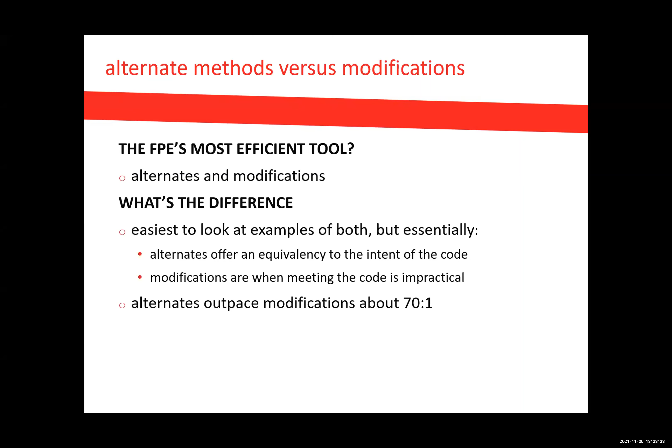We're going to go through and show you some examples, but you'll see where that comes into play, where existing structural provisions, not something that's easily modified in the field, impacts what is required by code. Whereas alternates are pretty much most everything else.

So let's start with the alternates. Alternates, known by any variety of names depending upon exactly what jurisdiction you might be working with. Our company standard, we like to call them requests for alternate methods. But the code verbiage in particular talks about alternate means and methods requests.

Other jurisdictions will call them code equivalencies or requests for variance. I'm sure everybody on here has dealt with them in one way, shape, or form over their careers. Those are driven by IBC section 104.11.

This is the provision in the code that allows the building official to accept alternate means and methods. Here's just an excerpt from the code. As you can see, in particular, it talks about the proposed design complying with the intent of the code, so meeting or exceeding what the code requires.

We'll look at some examples, and hopefully that'll become clear. The reason why these concepts with alternates and modifications are so important is because we don't live in a world of black and white. There are a lot of gray situations that don't specifically meet code. This is when the negotiations become important, the interpretation becomes important.

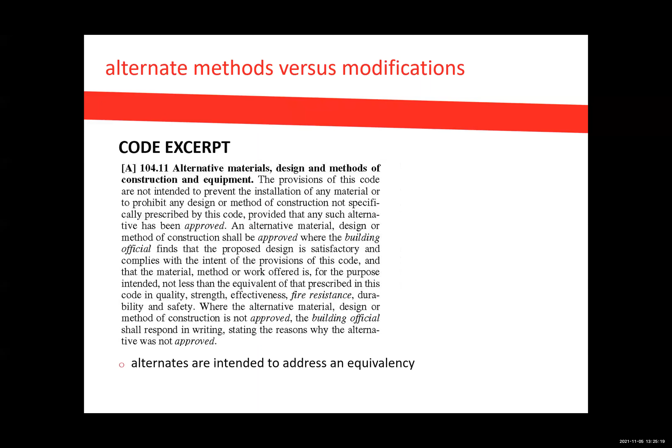This is why it's important for y'all as architects to have a baseline understanding of the building and fire code provisions. What I'm talking about here, both alternates and modifications, this is not something that you need a code consultant for, not that I'm trying to keep myself out of work. As long as you're a licensed design professional, you can go ahead and pursue these types of approvals. And I'm sure many of y'all have gone ahead and done that.

First example is actually probably the easiest, which deals with future code adoptions, aka a chip shot, right? These are the provisions that are going to be adopted, but aren't yet adopted because, of course, current code, the 2021 edition for instance, which is the latest edition of the IBC and IFC, the ICC codes, that has not yet been adopted by any jurisdiction here in the state, probably not anywhere nationwide at this point.

It takes a couple of years for jurisdictions to go ahead and adopt codes. So we like to look forward to see what exactly is involved, and what exactly is allowed under the future code provisions, and see if it's practical to go ahead and apply them to our current projects.

A couple of examples: egress width factors. Anybody who's been in the business for the last 10, 15 years may very well recall when, under the 2009 edition, the reduced egress width factors allowed for sprinklered buildings just went away.

That left a lot of projects and properties in a lurch. Think about it: you've got a property designed to a 0.15, 0.2 exit width factor, and all of a sudden the only thing you're allowed to use is 0.2, 0.3. How do you make modifications?

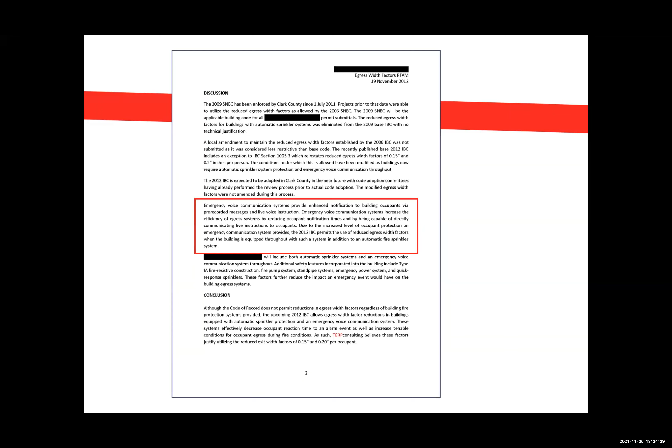So it kind of brings it to the table in terms of: here's what we're trying to do, here's why we should be able to do it, and once again, let me remind you, this is why we want to do it. Pretty straightforward. This is a pretty straightforward type of alternate.

No questions in particular about this, so let's move on and take a look. Okay, let's talk a little bit more about sprinklers.

Sprinklers are involved in a large number of the alternates that we work with, particularly because there are code provisions that are disconnected from the need for sprinklers. An example of this would be fire resistance ratings.

Fire resistance of assemblies is tested in accordance with ASTM E119. E119 is the furnace test, commonly referred to as the time temperature curve. That's what any assembly is subjected to, and it's a very big fire, and it is not sprinkler controlled.

So anytime you have an assembly, whether you're looking at doors, opening protectives, an assembly itself, or a through penetration system, they're all tested to the same time temperature curve. It's a difficult curve, intentionally a difficult curve to meet in terms of maintaining temperatures on the other side away from the fire.

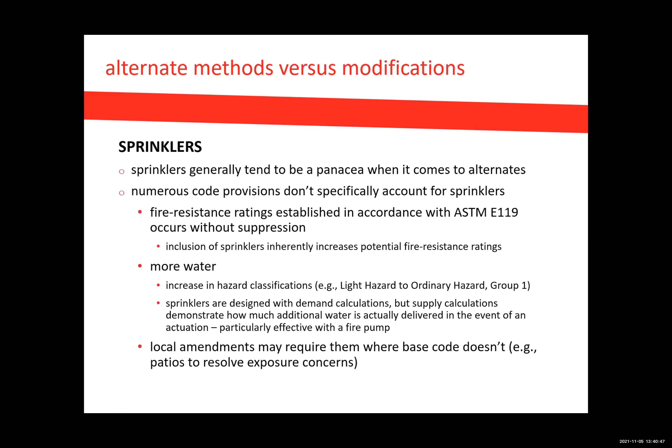So here we have a situation. Sometimes alternates are driven by design aspects. So for instance, a designer wants to go ahead and do something that's not exactly within the bounds of code, and that's understood from the beginning. Other times it happens because issues arise in the field.

For instance, we had a situation where the contractor did not install the proper ceiling system in a type 5A building, which of course is required, which is combustible 1 hour construction. In this particular instance, type X gypsum was inadvertently substituted for type C. If you're unfamiliar with the differences between type X and type C, type X is what you're going to find in most construction. Type C actually is infused with more glass fibers and so it has a greater structural stability. So you'll see type C gypsum board in horizontal installations, so ceiling lids, for instance, which was exactly what happened here.

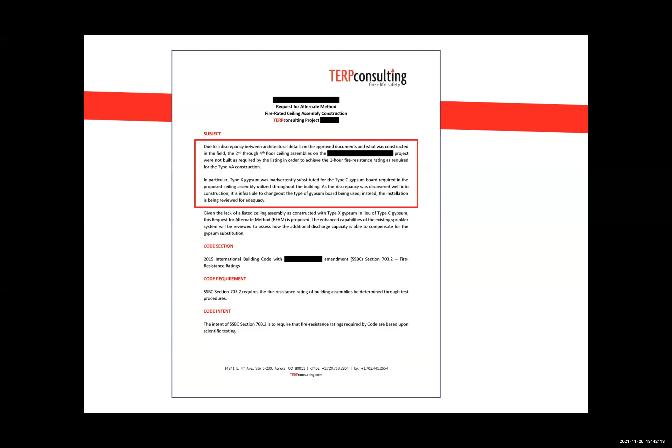Since it was discovered well into construction, we had to look at alternate means of providing the equivalent fire resistance rating. And so for this, we turned to sprinklers primarily. We took a look at the assembly and the discussion, once again, same kind of layout, request, discussion. So there was some discussion as to whether or not we could get 1 hour from the type X versus the type C. And the conclusion was that it was very likely not the case, because generally, if the manufacturer had been able to achieve the 1 hour rating with type X, chances are that's how they would have got it listed, because it's cheaper. And that means if it's cheaper, the assembly is going to be utilized more often. So the baseline was that while we were going to get some level of fire resistance rating, we weren't certain that we were going to get the 1 hour.

So what we did here was we took a look at the sprinkler system, and you'll see it says that we took a look at the base design, which would have required a light hazard system. This was a hotel, and would have required essentially a light hazard density, which is a 0.1 over the remote area.

This particular building had a fire pump, so we did what's called supply calculations versus demand calculations. You'll see the summary of that at the top of the RFAM. What that shows is we took a look at the remote areas in the building. Each has a different discharge area because you're looking at small compartments. Then we looked at the volume, and you could see those densities. Remember, our requirement was 0.1.

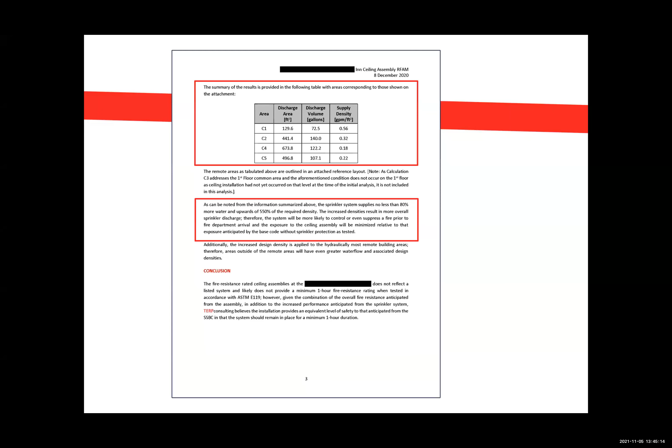As I said, this was supplemented by the fact that we had a fire pump, which certainly drives pressures higher than you would expect from a normal domestic system.

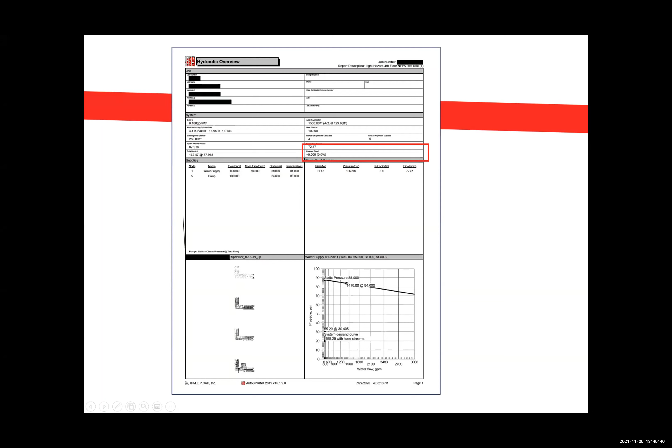This is just, I want to show this to you. I don't know how often y'all may look at sprinkler designs and hydraulic calculations, but what we've got right here, this is basically your safety factor—your pressure cushion. When you do a supply calculation, you're essentially driving the calculation to no pressure cushion whatsoever. So this is the maximum that would be theoretically available from the system given your design pressures. This can be a little difficult for a sprinkler contractor to get his arms around. Sometimes they need a little bit of prodding, but I can assure you they can do it relatively easily.

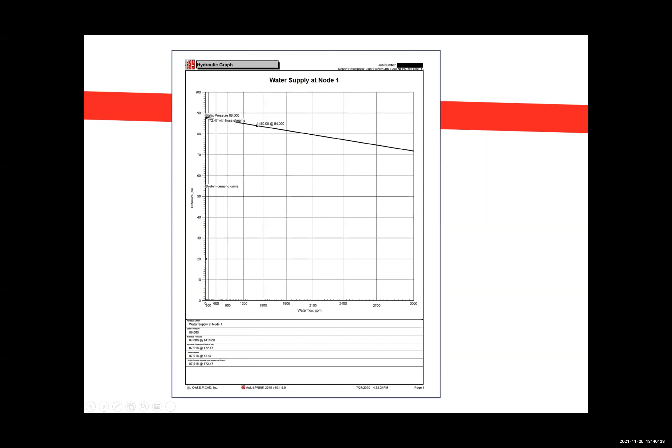If we were looking at a regular supply curve, you'd see the system demand sitting somewhere below the horizontal line, which represents the water supply. That's where you want to be under a normal design—it's where you're required to be, particularly when you have required safety factors from a jurisdiction. But in this instance, we wanted to represent how much water we could get out of the system.

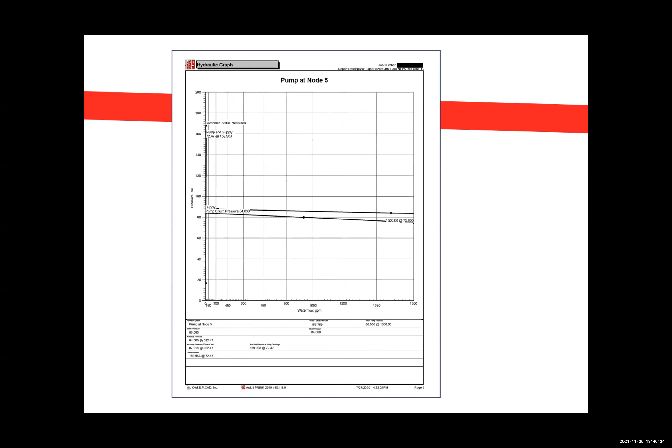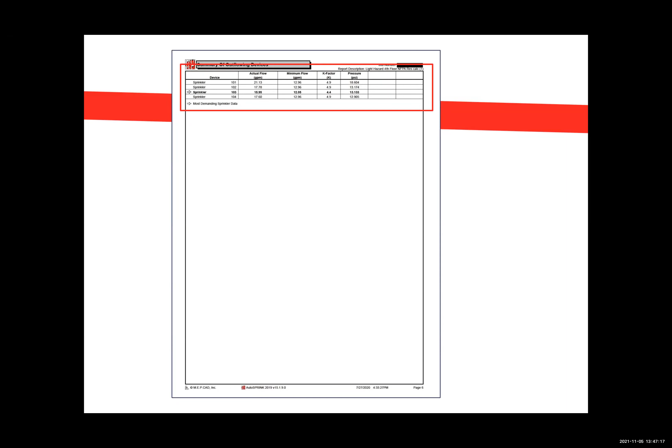Even better is that these remote areas are typically at the top of the building, so by their very definition they're remote areas. Therefore, you're going to get even more water generally throughout other parts of the building, particularly on lower floors.

So I see we have a couple of questions.

Thomas, yeah, I actually started my career in DOE, so I've done fire hazards analyses most of my career.

David asks, does any of the liability transfer to TERP with an RFAM or an alternate? Well, I would say no more than any other design professional. Obviously, we are design professionals—we're licensed, registered fire protection engineers. So we do take on a certain amount of liability. We don't take on all the liability, but of course, as a design professional, we're certifying that this approach would be appropriate, and we don't offer up alternates that we wouldn't otherwise be supportive of. So I hope that answers your question—yes, as a design professional, we do take on some of the liability.

And Tina, thank you so much for chiming in, particularly because I understand you were one of the people instrumental in getting me here today. So thanks a lot. I see that you had a question.

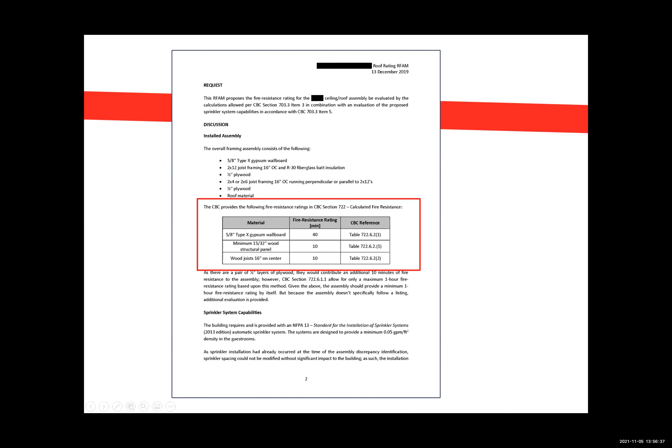Which, being combustible, still provides a level of fire resistance. So because we needed to provide a little bit more justification, this happens to be just a demonstration of the as-built condition, which was not the listed assembly. We once again turned to looking at supply side calculations. If you recall, we had numbers that went up to 0.55, 0.58 in the last example. Here you're looking at a range between 0.21, or even 0.16 at its lowest, up to 0.39.

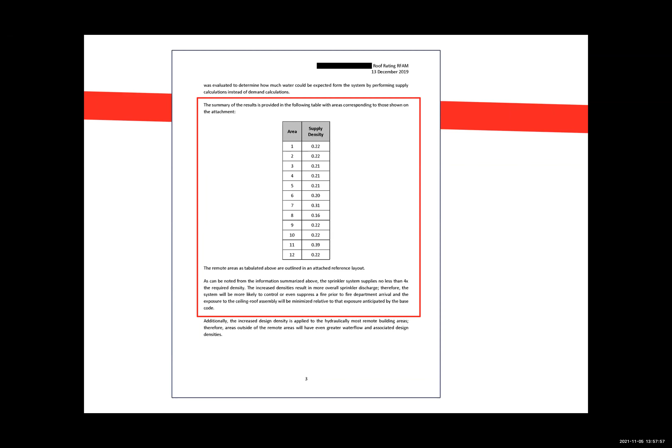Rick has a question about the need to file an appeal with the building official and how to do it tactfully without ticking off the plans examiner.

That is a very good question. It's funny, so I'm an engineer. I am the least mechanically inclined engineer you will ever meet in your life. I think I ended up in the right discipline, because so much of what we do is code consulting and negotiation. I'm almost much more akin to a lawyer than I am an engineer. Not that I'm not proud of having my engineering background, but the fact of the matter is a lot more of what we do is negotiation.

In instances like that, you just have to have conversations with the plan reviewer, agree to disagree, and then let them know, hey, I have to move this up the ladder. In a lot of instances, if you handle it tactfully, it's going to be all right. You might have an instance where a plan reviewer is absolutely adamant that you're wrong, and unfortunately those things do happen. It's just a matter of trying to handle it as best as possible, handle it with kid gloves. There are certain instances where people are wrong, and you don't necessarily have to prove them wrong, because that may win you the battle, but not the war.

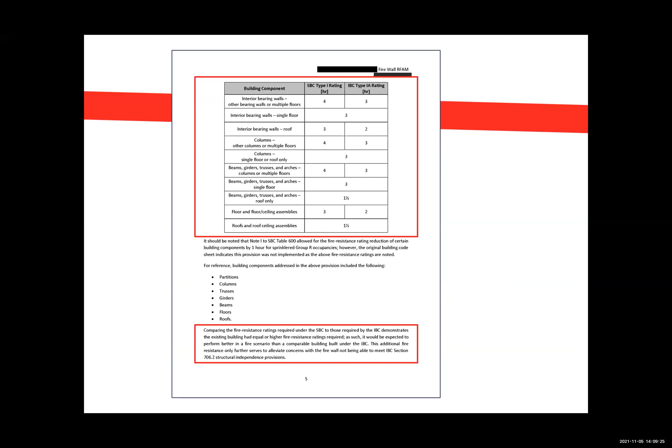The one caveat is California. Most jurisdictions in Nevada have gotten in line with the IBC for at least 2, if not 3 code cycles. Southern Nevada attempted to maintain UBC provisions but eventually got away from that. California still maintains a lot of UBC provisions, so for those of us working across the border, you have to keep that in mind. A big example is smoke control - active smoke control is no longer in the IBC but is still maintained under the CBC. That's just one of many examples.

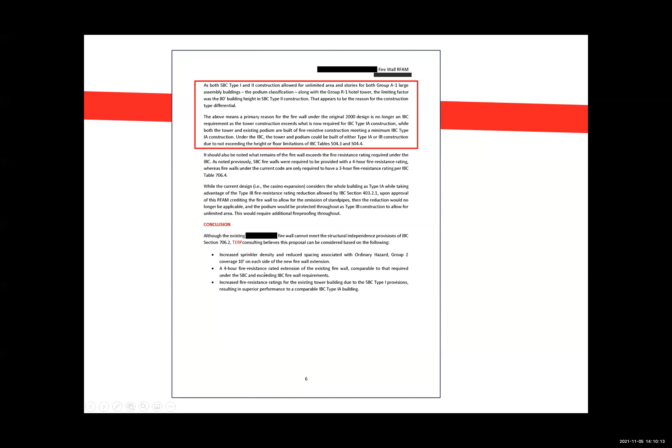Another interesting aspect was that area and height calculations were different under the SBC, which is one reason the building was built as robust as it needed to be - it was over-designed for the SBC, and over-designed for current code, because the SBC gave less credit to the construction types. The combination of these aspects is what we outline in the discussion as our arguments, and then in the conclusion we remind why what we're proposing is compliant.

Just checking if there are any questions.

There's a question about a public project requesting a local water agency increase the water stored in their water tank to provide sufficient water flow in case of an emergency to an existing school campus. I can't say that's common, but it also doesn't surprise me, not knowing all the particular details of the situation - it might.

The thing about water supplies is they can degrade, which is one reason safety factors are incorporated into sprinkler designs. It's more common for a water supply to degrade than to increase. All things being equal, equipment runs down, piping becomes corroded, valves may dislodge - anything can happen.

So from the standpoint of an increased water supply, anytime a jurisdiction tells you that you need to increase any aspect of the building design without a change in occupancy, I would question it, because legacy provisions generally tend to hold fast. The only instances where you'll commonly run into issues is when you expand a building or change an occupancy.

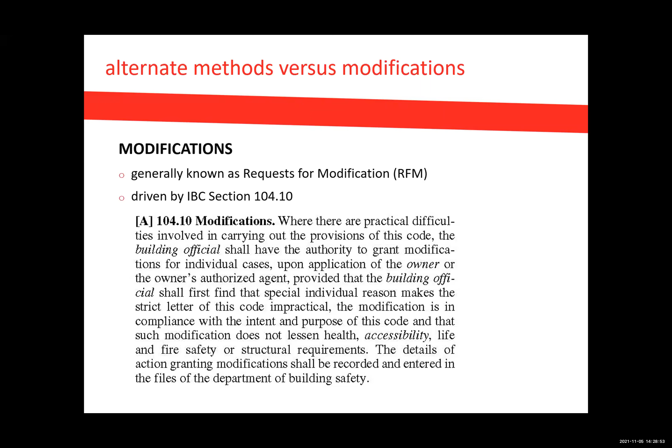So now we get to modifications. Whereas alternates are known by a lot of names, modifications are generally known as RFMs, requests for modifications, not to be confused with RFAs, of course. The key with modifications is that's where meeting the code is impractical. I'll tell you the majority of these instances have to do with structural provisions, so you're not going to move stairs, you're not going to move columns, and when that arises, that's when modifications come into play.

I've got a couple of examples here. As I said, we don't do as many modifications as we do alternates, but just to give you an idea of the difference, this is kind of an intro to what we had, and we'll show you the alternate afterwards.

A property was looking at a restaurant. They wanted to make use of an existing basement underneath it as a back of house prep kitchen, but needless to say, the basement wasn't exactly designed to be a prep kitchen. With an 8-foot slab, you're already talking about a low ceiling height, with depressed column bulkheads and existing utilities. Then there were new services that needed to be installed, and the health department required a drop ceiling, so all of a sudden you're well below the minimum 7'6" along the means of egress.

We took a look at the conditions, and here we are. So we took a look at the conditions, and with all the variety of existing conditions, you're clearly not going to raise the ceiling in a basement, and clearly not going to move columns. If anybody tells you that being a fire protection engineer is glorious, I'll show you this, where we measured percentages of ceiling heights in a space to determine exactly what percentage of the space was at various ceiling heights.

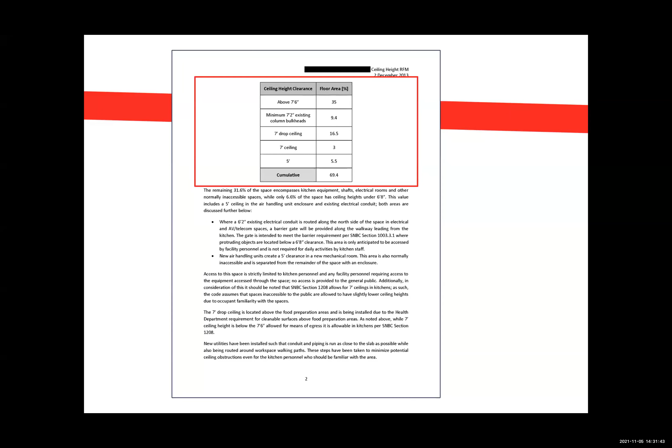Ultimately, it got through. That was quite a bit of back and forth, to be honest, but eventually we were able to get it through. That was one that was not expected, right? The designers didn't realize they didn't have the clearances until everything got put on paper, and then we realized, wait, we've got an issue here. Luckily, it was one where the jurisdiction was willing to go ahead and work with us to get it through.

So before we move on, there was a question regarding exiting. SoFi - I am not intimately familiar with SoFi. The interesting thing about...

Stadia is that you're allowed to use smoke protected egress widths. So what may appear to be less exiting than is required is actually allowable, because the concept is that the occupants will not be subjected to the conditions of fire. So no smoke banking down, tenability is maintained. And so that equates then to a reduced exit width, which essentially equates to a slower egress time.

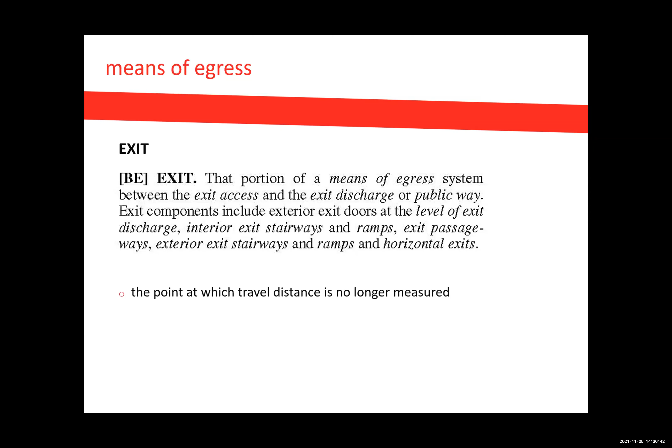Where it can get a little more complicated is with the concept of horizontal exits, which, because they're so specialized and such a good tool of ours, we're going to talk about separately. But as I indicated, a high-rise stairwell - that's the point at which travel distance is no longer measured.

So you're inside the exit once you're inside a high-rise stairwell. Here's an example: exit doors at grade, exterior exit stairway, interior exit stairway. Exits can come in many ways, shapes, and forms. An exit passageway is another form of an exit.

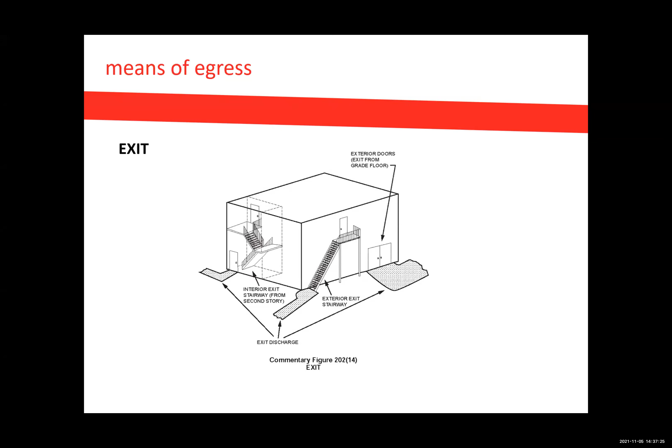That can be either a continuation of an enclosed interior exit stairway, or it can be on its own, where you have exiting at grade and you want to address travel distances. So as I said, exit access is anything that leads you up to the exit.

As a sidebar, this figure just cracks me up with these little stick figures. You've got a typical configuration of two enclosed exit stairways, each on one side of the building. Everything on the floor plate is exit access, everything leading up to it. The majority of what you're going to deal with is going to be exit access.

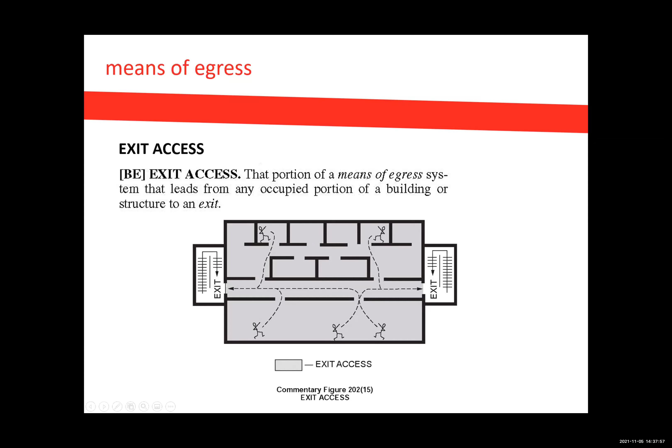And then you've got a diagram showing the exit discharge. An exit discharge is simply the area between the exit and the public way. It's important because the provisions and requirements regulating the criteria for each of these components differ. And the farther away you get from the building, clearly there's less regulation, to the point where essentially once you're on the public way, anything goes.

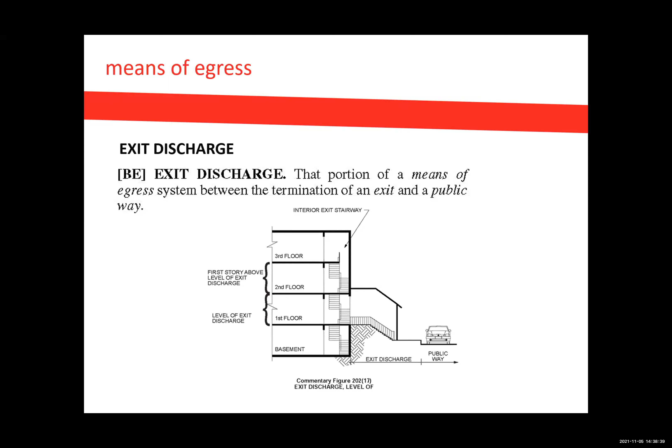In that you're no longer measuring exit width. You're not worried about capacity or direction. Once you're on the public way, you're free and clear as far as the building code is concerned.

And here's the definition of public way. Now, this leads to an interesting question for those of us in Southern Nevada, particularly when it comes to Fremont Street. Fremont Street is covered, but it's still considered a public way—that's where all the casinos fronting onto the Fremont Street Experience exit to. So while it doesn't strictly meet the definition of public way, it is truly a public way.

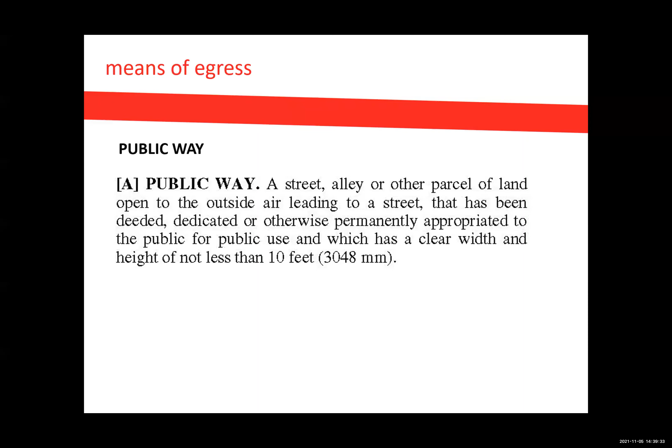Very similar—there are lots of instances where, as interior and exterior spaces kind of meld, you run into this issue more often.

The reason why it's important, just as a little reminder, is that once you define your exit, it's very easy to determine what applies to exit access and what applies to exit discharge. That's just one of those rules of thumb that makes it a lot easier when you, as a designer, are looking at means of egress in your projects.

But I do want to spend a little time on horizontal exits. Dependent upon the types of buildings you work in, you may or may not be familiar with horizontal exits. They're used quite a bit in institutional uses, healthcare, and also in large assembly spaces.

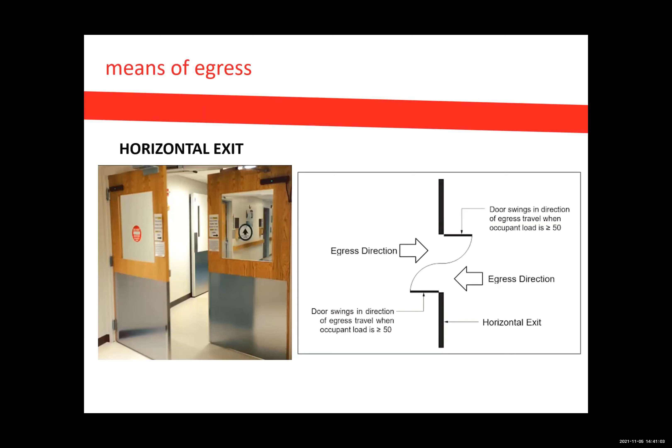The reason for this is because in large buildings in general—what a horizontal exit is, essentially, is a part of the building that serves as the exit. I've had instances where you introduce this concept to an AHJ and they get very confused if they haven't actually encountered it before, because it seems counterintuitive.

I would even say it's like black magic. I've had instances where AHJs have questioned whether or not it's actually even allowable, truth be told. They're not free, but they are very, very beneficial when it comes to larger buildings and larger occupant loads.

There are provisions, certain criteria you need to meet. You cannot have more than half of your required exits through a horizontal exit. And the key provision is that you've got a 2-hour separation going from exterior wall to exterior wall, and to the roof if you don't have a 2-hour rated floor slab.

So what you're essentially doing is creating a 2-hour box, and that box is the equivalent of what you would find in a rated stairwell. So instead of having a vertical stairwell, you've got a horizontal exit enclosure where people enter, and at that point can then meander off to any other exit.

You have to have a refuge area, generally 3 square feet per person. That can be in corridors, back-of-house areas, anywhere that's generally open and accessible—it can't be behind locked doors. If you have multiple tenants, it can't be in another tenant's space.

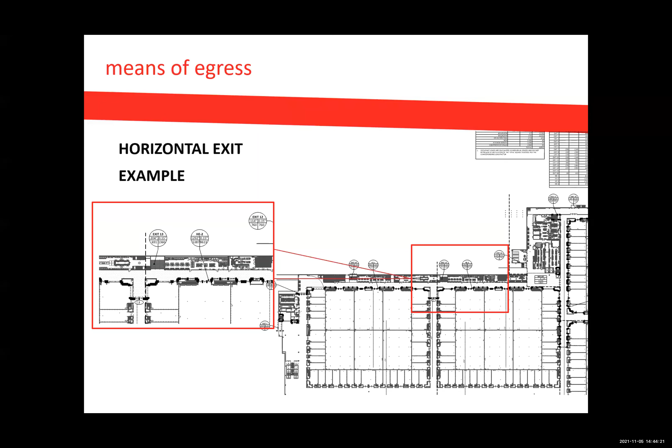And what we've got here is that same project, just showing a representation of our exit capacity tables, in terms of sending people through the horizontal exit, rather than having to account for them from the exits of the buildings themselves simultaneously.

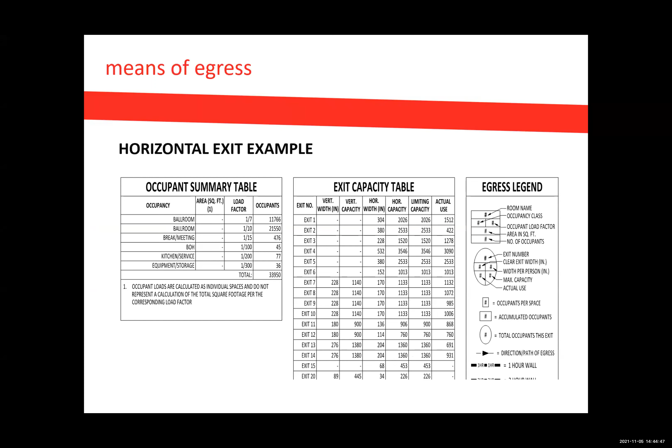So now I want to talk a little bit about this. A number of the questions brought up previously were asking about the process, right? And part of the process is having a good relationship with your AHJs.

You have to try to approach it from a team standpoint. I think we all know there are AHJs out there that actually try to be a part of the design team, and that can be a little bit difficult. But I'd argue that's certainly better than those that don't want any part of it whatsoever and are actually confrontational, which there are those AHJs out there too.

So one of the things I try to convey to both my staff and clients is how to go ahead and open up those lines of communication. So the first step is get to know your AHJs.

20 years ago, I came to town. I didn't know anybody. I made a specific effort to reach out to all the AHJs in Southern Nevada to introduce myself and let them know I'd hopefully be working with them at some point in the future. Some of those relationships I still have 20 plus years later.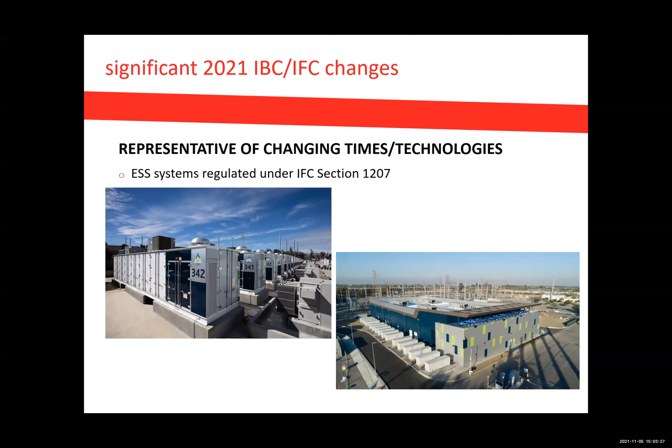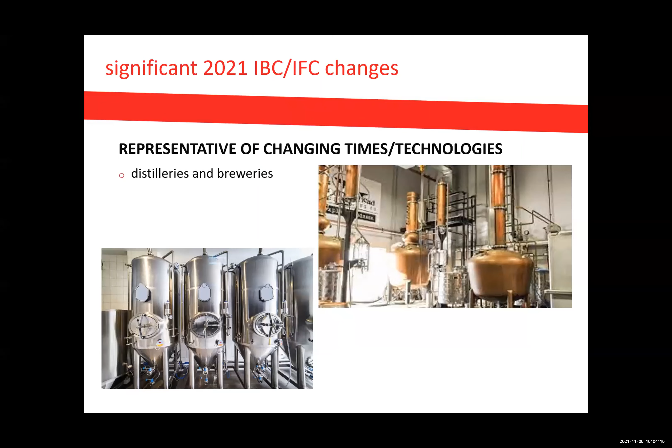Another good shift under the 2021 is distilleries and breweries. Here alone in Las Vegas, the beer scene has grown by leaps and bounds. I know in Northern Nevada, same thing—Reno and the surrounding areas are a hotbed of great breweries. It used to be that distilleries and breweries were Group H. They are no longer, under the 2021, regulated as Group H. However, there are a series of requirements you have to meet that implement safety provisions to allow them to not be Group H. That's important to keep in mind, particularly if you're working on these types of projects now. If you're working on a brewery or distillery, go to the 2021—it's available online at ICC—and check out what these provisions are and see if they're helpful to your cause.

Another type of venue that practically didn't exist 10 years ago—it really seems like the last 3 to 5 years they've hit the scene—is puzzle rooms, escape rooms. They weren't regulated by the code; certain jurisdictions regulated them as special amusement areas. That has now been codified. Under the 2021, puzzle rooms and escape rooms are considered special amusement areas. This is important because special amusement areas require sprinklers, voice evac, and special exiting provisions. You've got lots of mom and pop owners that want to open escape rooms in your standard strip mall, which may not be sprinklered and most likely doesn't have voice evac.

That can be difficult. We've had instances where we've had escape rooms built in buildings without voice evac, and we've had to put in individual voice evac panels for the room, for the tenant space itself. So keep that in mind if you're dealing with an owner that wants to do an escape room.

The good news is that now there's clear direction, so you're less subject to the whims of an AHJ than you would have been previously, where there were no provisions.

Gender neutral bathrooms, right? I think anybody that's traveled to major cities knows these have been around for quite some time, but they weren't readily allowed by code. They are now allowed under the 2021. So that's good. It provides direction and recognizes the changing times.

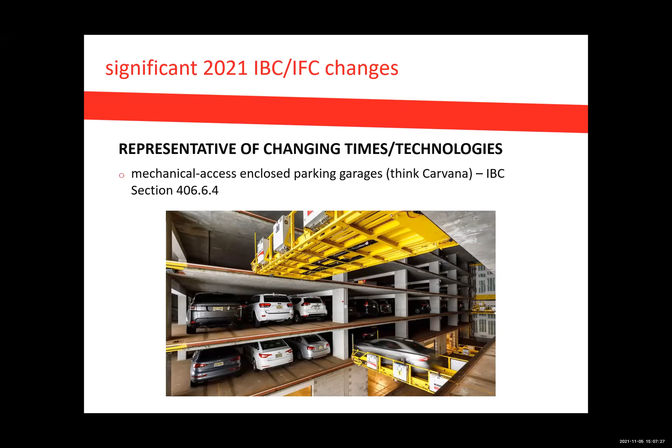Once again, this is good because if you're dealing with this kind of application, now there's clear direction in the code as opposed to it just being nebulous and up to the whims of the AHJ.

Occupied roofs. Occupied roofs are everywhere, and they have been for quite some time, but it took a long time for the codes to recognize occupied roofs, to the point that provisions have been pulled into the 2021 to address most, but not all, of the issues associated with occupied roofs. So off the bat, the provisions have been expanded under 503.1.4 under the 2021.

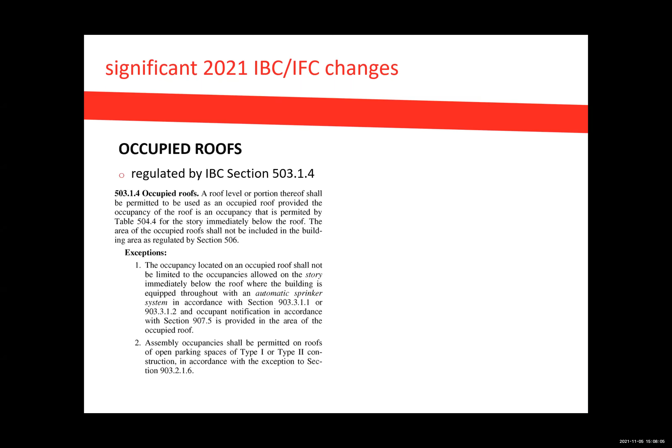So as a kind of rundown, you're allowed occupancy to be consistent with whatever occupancy is on the floor below. The exception being sprinklered buildings, where you're allowed to have any occupancy up on that level as long as it's allowed under the base code.

The things that the code did make clear this go around: rooftop areas are not included in the overall area calculations, and the occupied roof does not contribute to building height or number of stories.

What the code fell short on, and is still in question and still open to interpretation, is whether or not an occupied roof can establish a high-rise building.

I will tell you that the jurisdictions we've been dealing with, both in northern and southern Nevada, have taken the stance that yes, that establishes a high-rise building. And given in conjunction with our 55-foot threshold, that can be somewhat problematic.

Do remember that if you have an occupied roof, essentially everything has to be maintained less than 4 feet above the roof surface. So it's truly just an open occupied roof if you don't want it to be considered a story.

And just circle back around to the high-rise provision for a second. The reason for the uncertainty is because of the terminology of 'highest occupiable level,' which determines high-rise provisions, versus 'floor' versus 'stories,' which are clearly exempted from occupied roof provisions.

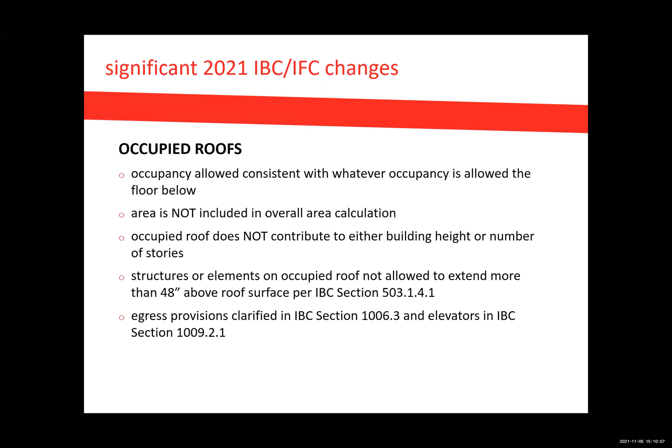So another concept that's now kind of been pulled in that we've been seeing more of lately: social stairs. I'll be honest, until I started putting together this presentation, I did not know that's what these were called, but it makes perfect sense. As you can see, it's essentially a social area, somewhat of a combination of a regular stair and assembly seating.

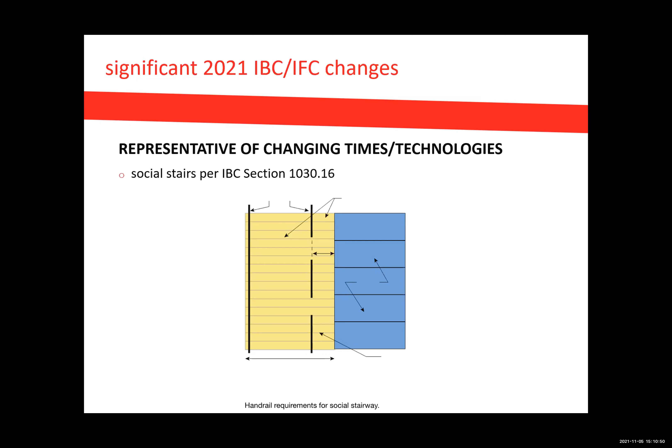So now the code provides some guidance as to where handrails need to be, that there need to be breaks in the handrails so that people can access the seating areas, and what those widths need to be for when you have to have more than one handrail. So that's pretty helpful. Just another example of social stairs.

3D printing operations. I pull this in, not because I think everybody's doing 3D printing operation projects, but because honestly, I didn't know that 3D printing operations were so prevalent that they needed their own code section. Here we are, IFC section 320, in case you happen to be getting into it.

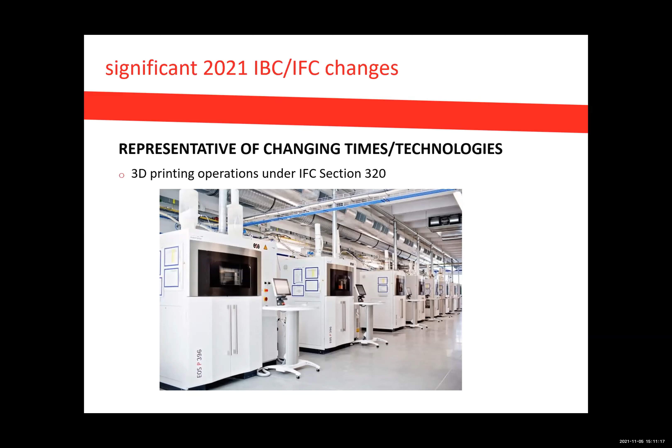If you're like me, you see this stuff everywhere nowadays. It is all over the place. Essentially now you're regulated if you're within 30 feet of the building, on a rooftop or on the side of the building, and outside of certain size parameters, essentially 6 foot. 6 foot is the parameter. Then you're basically regulated under NFPA 701, which for some of these products can actually be somewhat difficult, because for anybody who's dealt with these, they are plastics, pure and simple. You can generally get compliance with 701 with a spray applied fire resistive product, but it's not always a guarantee.

Some other changes, what I like to refer to as clarifications. Atrium smoke control. We've encountered this for years because of the definition of atrium, where it talked about 2 or more stories being connected. A lot of people thought that you had to apply atrium provisions where you interconnected 2 floors. Atria were always design options. The definition has now been clarified to make that more clear, that atria outside of Group I's are where 3 or more stories are interconnected. And then there's some leniency on smoke control, where you have atria where only the bottom 2 levels are interconnected.

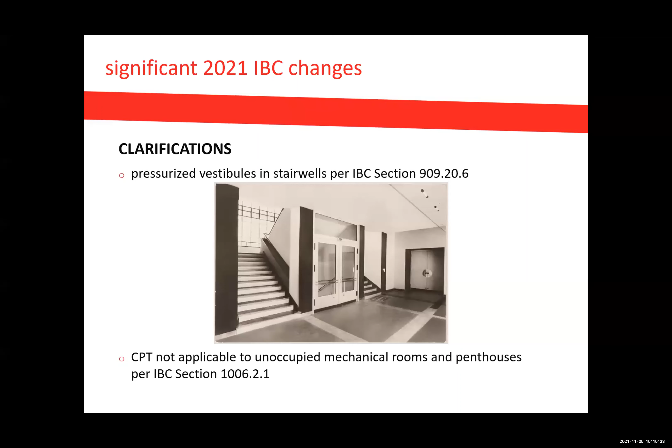Another good one, door sizes, no longer limited. Used to be that doors were limited to 4 feet. We would do alternates all the time for these types of doors to allow 5, 6 foot doors. Now it's all performance criteria. As long as you can open the door with the same force that you would a regular 3 foot, 4 foot door, you can have it as large as you want.

A couple more clarifications. It used to be that exit passageways had to extend to the floor assembly above. That is no longer the case. The code now acknowledges that you can do a rated lid to go ahead and finish your exit passageway, the top of your exit passageway.

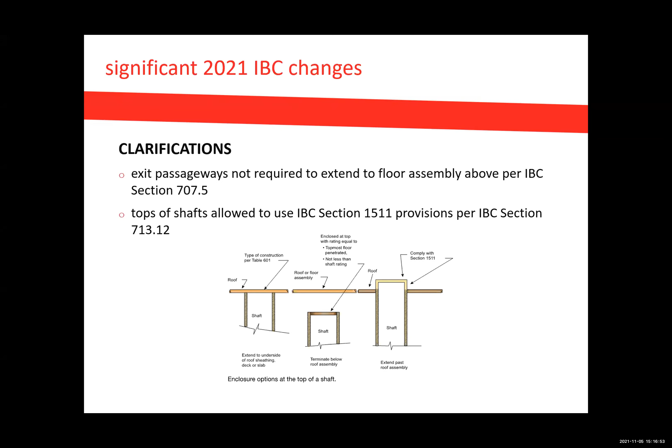Similarly, there's a clarification for ending shafts. IBC section 1511 is a pretty useful section. We're going to talk about some of these forgotten provisions under the IBC, but chapter 15 deals with penthouses and essentially roof appurtenances. This recognizes that if you have a shaft that extends above the roof, you don't have to protect it because you generally don't have to protect much of anything that's up on the roof.

Some changes come from shifts in hazards. These provisions here under 1010.2.4 deal with exterior spaces that owners, tenants, and developers want, but they want to be able to lock these due to security concerns. So therefore these are the provisions that allow you to lock doors from exterior spaces entering back into buildings.

I'm not going to read through all of them. Just know that it's under item 8 under IBC section 1010.2.4. Most are pretty benign, but one in particular that stands out is weatherproof telephone or two-way communication system. That is something I don't think most designers are ready to account for. So just keep that in mind.

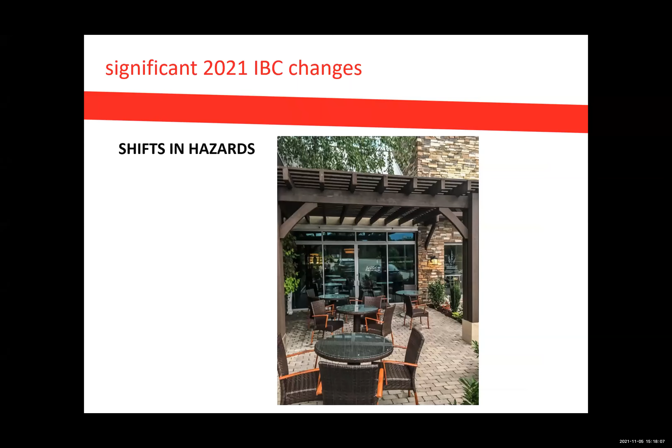We've got a couple more slides. I know we're running close on time, so I want to just kind of get through these and then maybe wrap up with questions.

An unfortunate shift is locks in educational occupancies. Of course, this is driven because of the unfortunate shootings that we've had in schools. So now the code recognizes that there are needs for locks from classrooms and outlines provisions.

Another interesting provision that anybody who does larger development should keep in mind, because of the combustibility of cars nowadays: open parking garages under the 2021 that exceed a fire area of 48,000 square feet - that's fire area, not floor plate size - and of course in an open parking garage it's going to be a single fire area. Generally you have to be sprinklered, and open parking garages now require automatic instead of manual standpipes. Do keep that in mind. That is actually going to be a pretty big deal, particularly if you're doing large scale developments or large scale open parking garages. That is a huge cost.

Fire stopping special inspections are now required for Group R fire areas exceeding 250 people. That's going to be most of your hotels, even low-rise hotels probably going to exceed that number. This was not required under previous editions of the code.

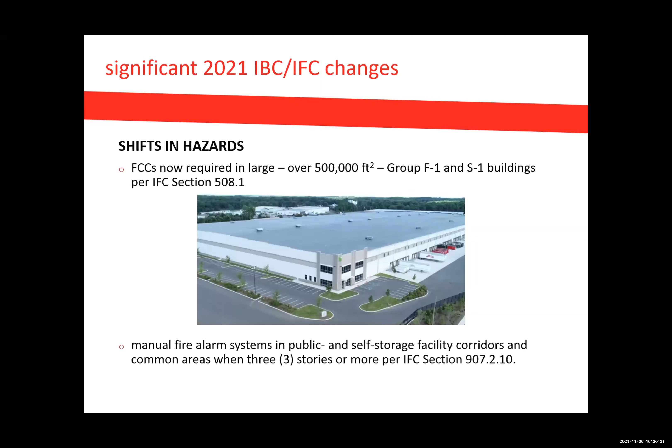And here's a big one. Now it's a big one, but it comes with a caveat. The 2021 will require retrofit sprinkler systems in high-rise buildings. However, the code gives you 1 year to establish a compliance schedule and then 12 years to implement. So 13 years from the date of adoption of the 2021, which of course in some jurisdictions might still be 3 to 5 years out. Still a really big deal though, because a lot of jurisdictions have pushed against retrofit sprinkler systems in high-rise buildings.

It's going to be interesting to see how this plays out, because for those of y'all that deal with residential, you may be aware that the IFC pulled in single family sprinkler systems under the 2015, I believe, might even have been the 2012, and a lot of jurisdictions locally wrote it out, including a number of them here in the state of Nevada. So this is also something that might get written out.

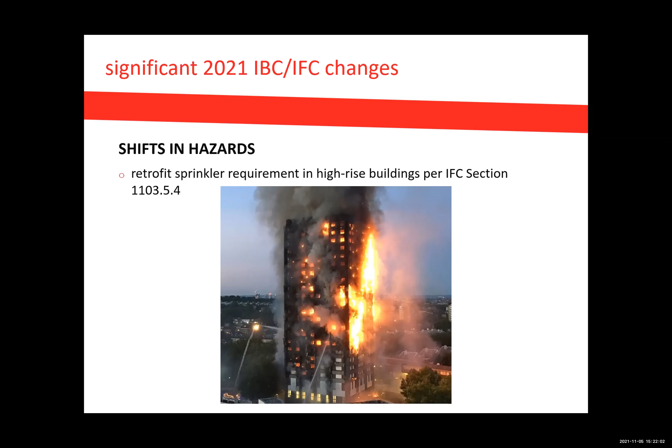It doesn't affect, funny thing is it probably doesn't affect Vegas as much as it might Reno, and frankly, honestly, other jurisdictions, older cities. New York has tons of non-sprinklered high-rise buildings, as does Denver, as does LA, San Diego - older cities. So I think this isn't going to affect Vegas, Southern Nevada, as much as it would maybe Northern Nevada. In Southern Nevada, we have a tendency to go ahead and rip down buildings whenever they get over 10 years old.

So just a couple more to go over. Construction barriers are now regulated. They are required to be non-combustible or meet low flame spread criteria.

Savvy jurisdictions have already been regulating construction barriers, but now it's a requirement in type 1 non-combustible buildings. Extraction equipment, of course, that's a result of...

The cannabis industry. This provision recognizes that there's a listing forthcoming for extraction equipment. It used to be, up to this point, you have to have an engineer certify extraction equipment because there is no actual listing. That listing is forthcoming from UL and should be adopted, should be in place once jurisdictions start adopting the 2021.

Interesting provision about mass timber. This is not heavy timber construction, which is now type 4 HT, but these are varying degrees of composites that demonstrate substantial fire resistant properties. You're not seeing much of it in our areas as of yet, but you do see a ton of it in the Pacific Northwest, and I suspect that as it catches on, you'll see it elsewhere.

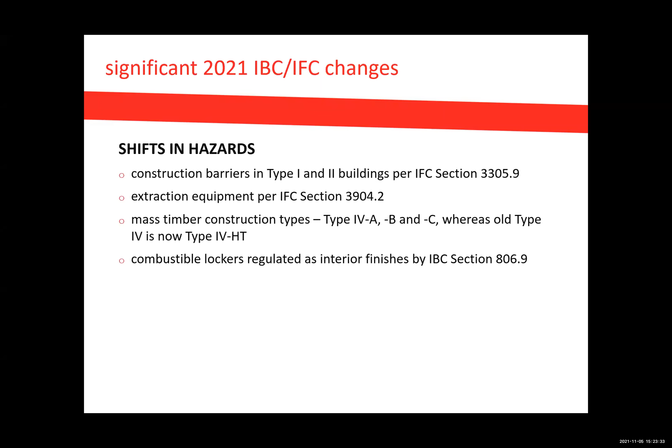And then combustible lockers. I just found that kind of interesting. They're now regulated as interior finishes.

So this last chapter, the last item I want to go over is what I refer to as forgotten chapters. Most of our work deals with chapters 1 through 11, 3 through 11 in particular. But there are a number of chapters that are important to understand because they'll rear their ugly head, or they could be beneficial depending upon the situation.

Chapter 12 deals with interior environment, which sounds relatively benign, but is a catch-all for ventilation, lighting, temperature, and deals with unoccupied spaces that kind of fall through the cracks in other sections of the code.

Chapter 15, we talked about section 1511. That covers rooftop structures that have greater leniency than your building interiors—penthouses, domes, cupolas, spires.

Chapter 26, plastics. We refer to chapter 26 constantly. It deals with light transmitting plastics, foam plastics. You can hardly do a job nowadays without plastics, even in non-combustible construction. So we find that jurisdictions are referring to chapter 26 quite often in their plan reviews, and we're having to implement the provisions in designs.

Do recall that chapter 30 now is basically the catch-all for elevators, whereas there used to be provisions for elevator lobbies in chapter 7 and exit provisions in chapter 10, like everything now for elevators, go to chapter 30.

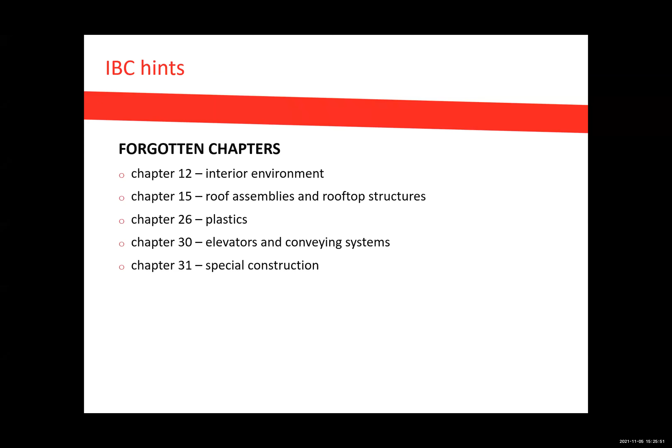Membrane structures are covered under chapter 31. Canopies, awnings are some of the more common applications. But chapter 31, if you're encountering something strange, there's a good chance chapter 31 might have it.